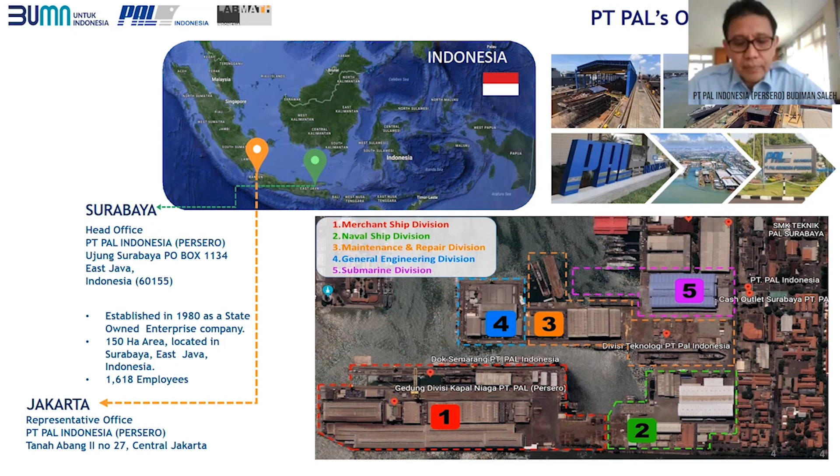We employ around 1,618 employees. We also have a rep office in Jakarta, basically for commercial activities. From these pictures, you can see the layout of the facilities, including the merchant and naval vessel maintenance, repair, overhaul, general engineering, and submarine facilities.

Our product portfolio generally consists of new shipbuilding for both merchant and naval vessels, submarines for new building and maintenance, repair and overhaul, general engineering for electrification and oil and gas activities, and technology development, just like any engineering company should have.

This slide basically depicts all the products that we are proud of. This is not an overnight achievement, but rather requires focus and the ability to adapt to changes.

Being a company from a developing country, we are proud that we have delivered 282 units of general engineering products, as well as 232 units of vessels or ships for various applications.

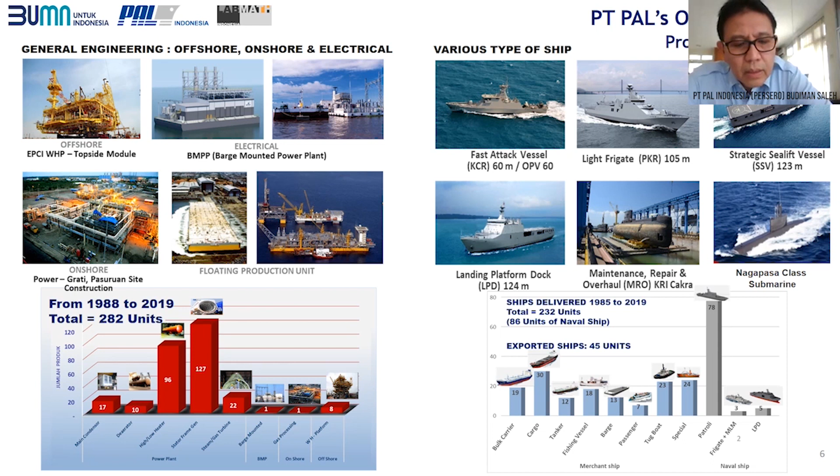These are our customers around the world. Quality, cost, and delivery time play an important role.

Like any big and modern shipyard, we made lots of investment in facilities for manufacturing the blocks, integrating the blocks, loading and unloading, floating, secure, environmentally controlled warehouse, laser tracker, and other test benches for all navigation, communication, sensors, and weapons.

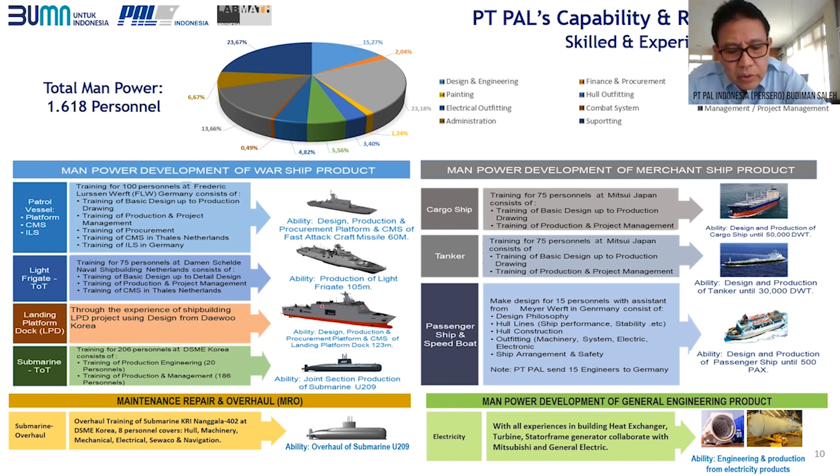We send our employees to various partners around the world for its uniqueness, for defense and non-defense purposes. The names might be familiar for all the audience, such as Lurssen, Damen, Daewoo, Mitsui, Meyer, Mitsubishi, and many others.

We are an integrated IT company for every process or activity. We use all the best engineering softwares available in the market and make them integrated through our IT systems.

In order to cut down the production time, increase the quality, reduce the cost, we utilize the modular construction concept, such that all the big blocks are manufactured and equipped with the components, piping, hosing, electronics, and many others. Every function test is carried out for every module. Once all the modules are finished, the integration is made much easier, just like playing or building Lego blocks.

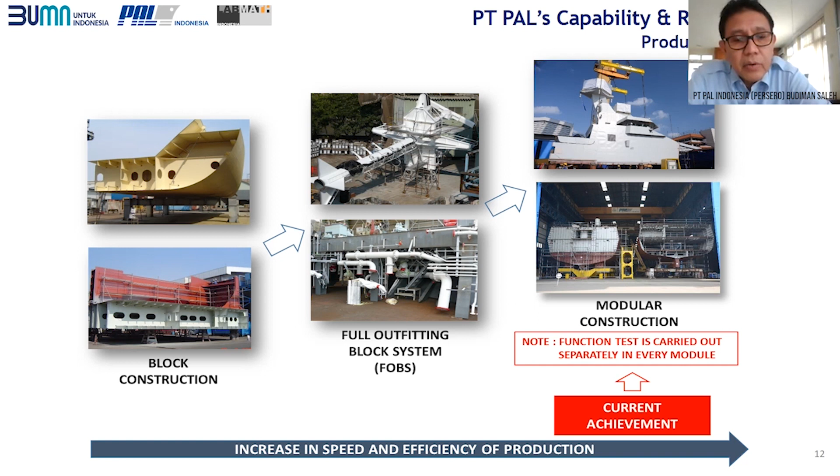As a wrap-up to all the requirements and achievements, this slide shows all the mandatory certificates that we have, including the awards and intellectual property rights for our products.

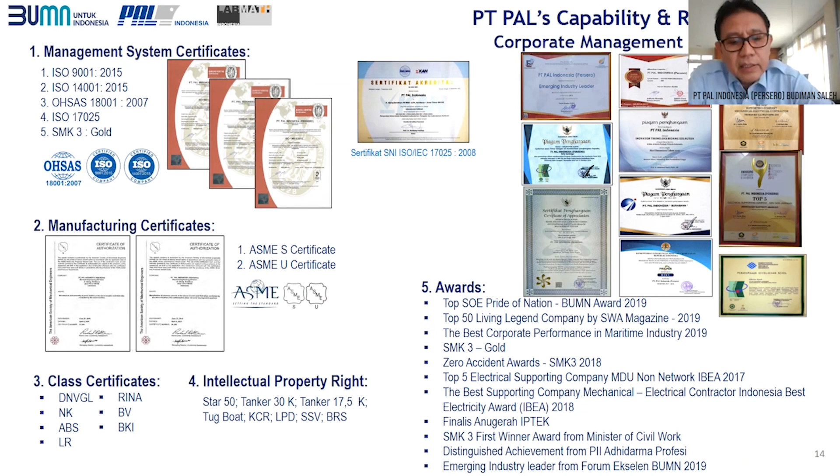Using local resources as well as foreign partners, we developed our famous 57-meter fast patrol boat. Soon it was followed by our indigenous design 60-meter kapal cepat rudal offshore patrol vessel, which is equipped with top-of-the-line missiles and sensors.

We work together with hydrodynamic labs from Indonesia as well as from abroad in order to improve the design and performance of the vessels. For the support ship, we are proud in producing various types of landing platform docks for expeditionary operations, catastrophic evacuation, hospital ship, submarine tender for charging the battery, supplying water, distilled water fuel, loading and unloading the torpedo and missile, and many other purposes.

Since I took the office, we were pretty much focusing on defense and energy sectors. For energy, electrification is the most important target all over Indonesia. We are an archipelagic country. Electricity is still scarce in some remote islands. Barge-mounted power plant, hopefully, is our solution for Indonesia Power and PLN, the State Electricity Company.

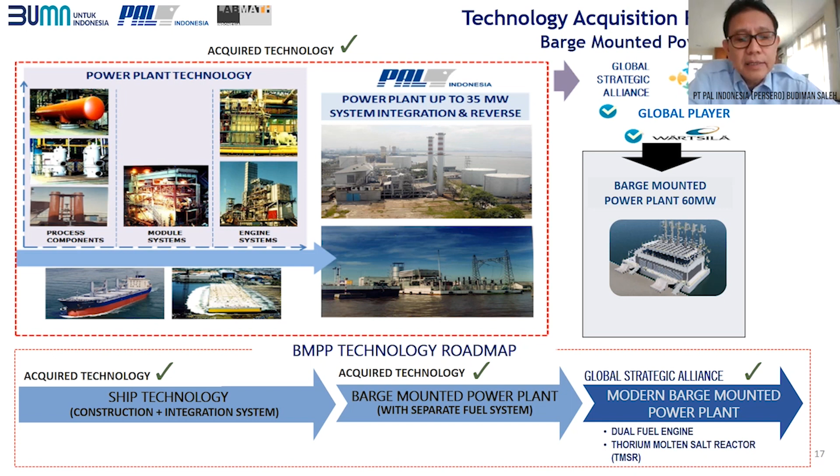Again, being an archipelagic country, distribution of LNG for remote islands, tourist destinations, and many others has to be planned carefully. We propose relatively small LNG carriers, up to 20,000 metric ton carriers. We master shipbuilding technology, but we need to establish a solid collaboration with companies who own LNG tank technology. With this collaboration, we can capture the Indonesian captive market.

Thorium is abundant in Indonesia, even more than uranium deposits, and safer than uranium. Together with Thorcon International, PTPAL performed the feasibility study for design construction, reliability study, and site study.

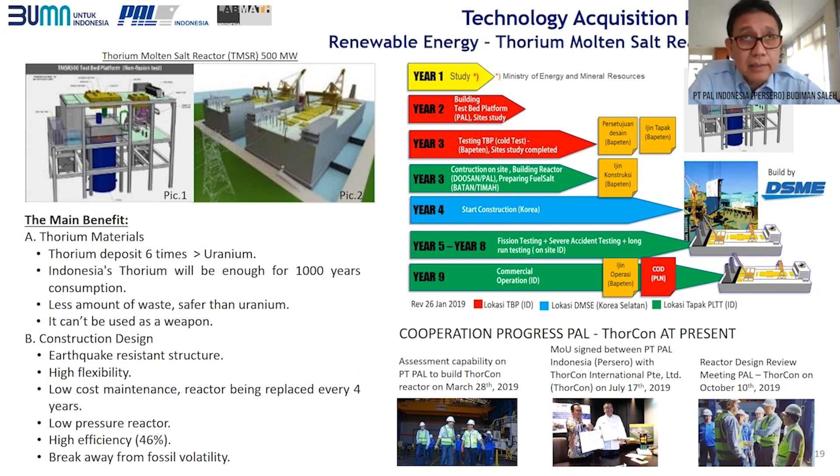Sea wave and tidal as renewable energy are the new topic in PTPAL right now. The basic idea is that we should cultivate what we have in abundance in Indonesia and the technology PTPAL is mastering, in producing a reliable source of sea wave power plant and tidal energy. Of course, collaboration with partners who own the technology is a must.

I selected a few feature products that we are focusing on as our own businesses at this moment. First, barge-mounted power plant can be propelled or non-propelled, can be deployed to any remote area with no electricity, can be deployed to any catastrophic damage area, and many others.

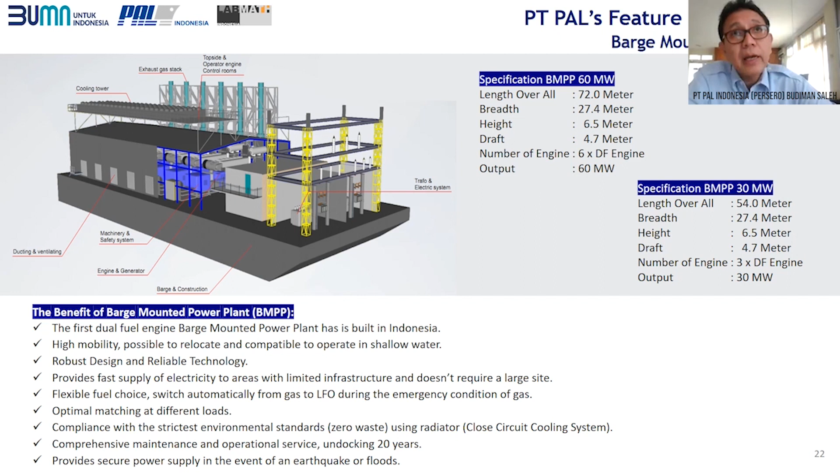Being an archipelagic country and in the Ring of Fire, we are proud of our hospital ship. Yesterday, in fact, we did the first steel cutting of the second hospital ship. The hospital ship can perform all activities, including nuclear, biological, and chemical threats. The hospital ship can also serve as a mini airport where helicopters can land and take off.

For expeditionary force or operation, mass rapid evacuation, and catastrophic evacuation, we produce our famous landing platform docks. Indonesian Navy and Philippine Navy were using this LPD during the RIMPAC exercise with at least 60 other countries around the world.

To safeguard and patrol our borders, we are proud to produce our Kapal Cepat Rudal, or KCR, Offshore Patrol Vessel, equipped with top-of-the-line sensors and weaponry.

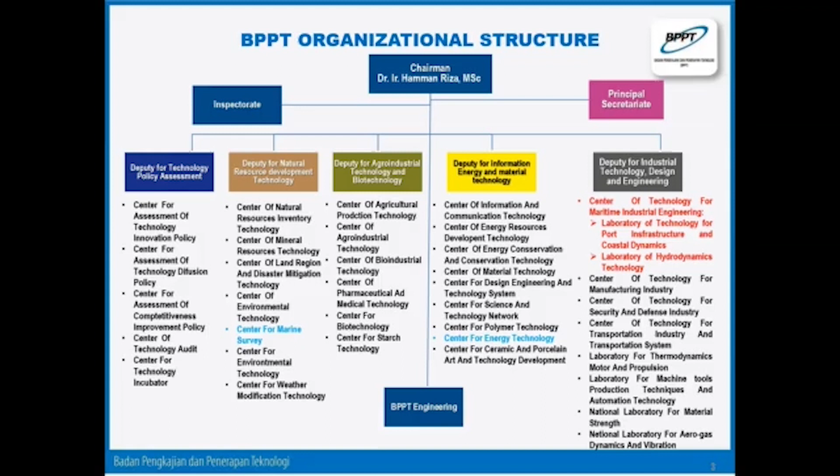This is our Center of Technology for Maritime Industrial Engineering. The Center of Technology for Maritime Industrial Engineering is located at the head office in Jakarta.

However, the laboratories are outside Jakarta. That is the Laboratory of Technology, Port Infrastructure, and Coastal Dynamics, which we call BTIP-DP, in Yogyakarta, and my laboratory, the Laboratory for Hydrodynamic Technology, well known as the Indonesian Hydrodynamic Laboratory, in Surabaya.

This is the Coastal Dynamic Laboratory in Yogyakarta. Their activities are port design, physical hydrodynamics, and tests about coastal dynamics like wave breakers, sedimentation, tsunamis, breakwaters, and so on.

In the laboratory, they have a tank or basin for 3-dimensional testing, especially for tsunami physical model waves, and a wave flume for 2-dimensional tests. They also perform many numerical analyses for coastal dynamic problems.

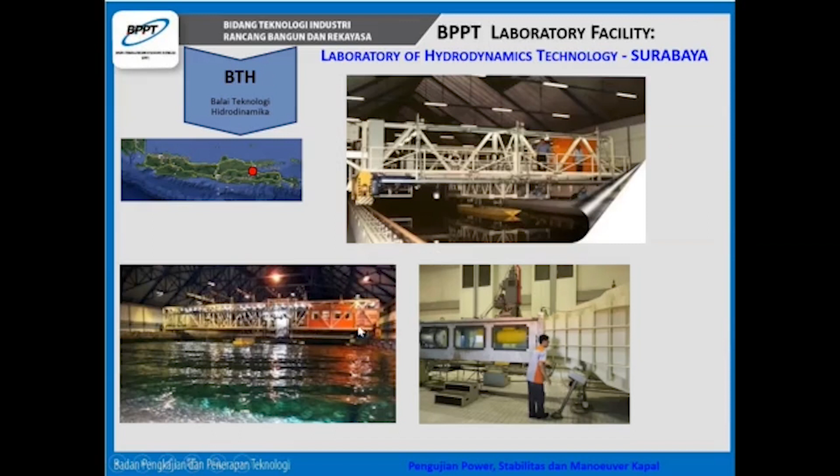I would like to explain the main activities in Indonesian Hydrodynamic Laboratory. This is the aerial view of our Indonesian Hydrodynamic Laboratory by Google Maps. The laboratory area is about 7 hectares.

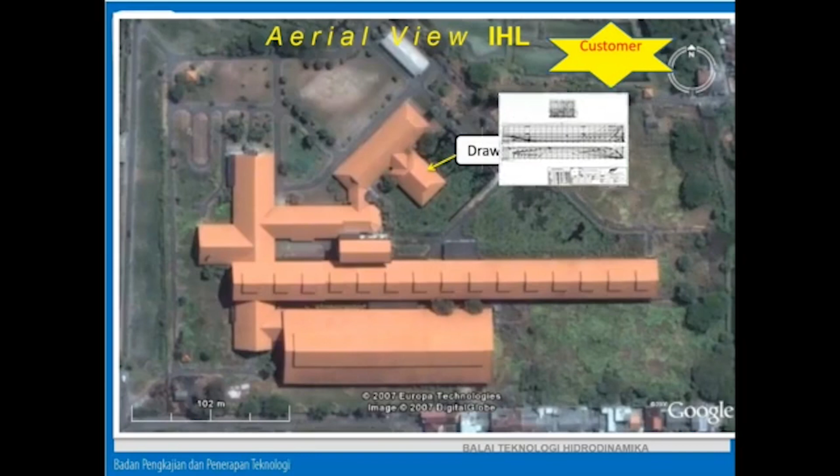We give many services for the customer, especially from shipyard industries and oil and gas companies. When the customer comes to us, usually they provide drawings, like lines plan, kind of hydraulic testing, and so on. We make a new scale drawing, and send this to the ship model workshop and the mechanical workshop.

There a physical model is made, ship model and mechanical model like propeller, stern tube, and so on. When the model is ready, it will be checked by quality control, because we already use ITTC standard and ISO 17025 standard for hydrodynamic testing.

After that, the ship model will be sent to the hydrodynamic facility like towing tank, maneuvering, and ocean basin, or cavitation tunnel.

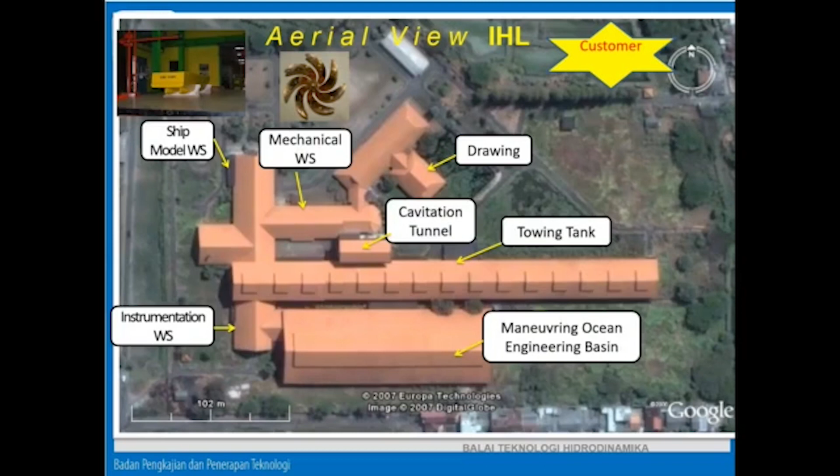This is our towing tank. The dimension of the towing tank: the length is 235 meters, the width is 11 meters, and the water depth is 5.5 meters. It is equipped with carriage and wave generator. The maximum speed of the carriage is 9 meters per second, and the maximum wave height is 70 centimeters.

The service of this facility is for ship power prediction, wave pattern analysis and flow visualization test, propeller open water test, engine matching solution, unconventional propulsion system model test, and numerical computation. We also use statistical power prediction.

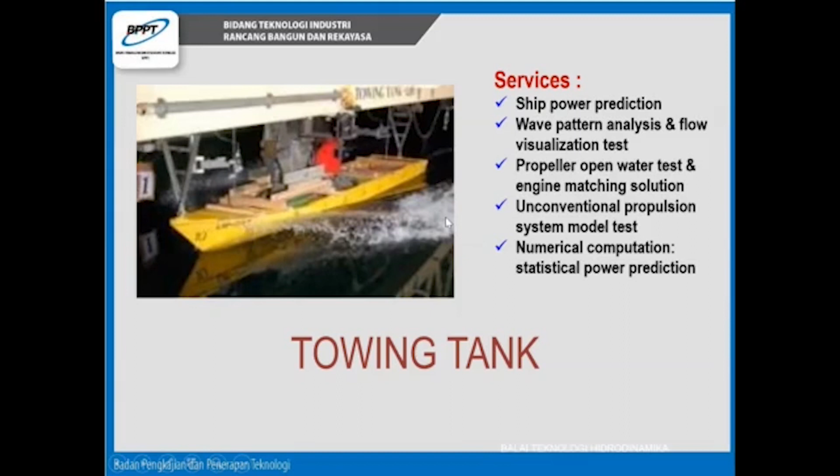This is our maneuvering and ocean engineering basin called the MOB. The basin dimension consists of two basins. It has a deep water basin: the length is 60 meters, the width is 35 meters, and the water depth is 2.5 meters. But in the middle of the deep water basin, there is a pit with size 5 times 5 meters for horizontal and 9.5 meters for water depth.

Another basin is shallow water. The length is 45 meters, the width is 35 meters, and the water depth is 1.25 meters. It is equipped with wave generator, with a longitudinal side of wave generator and transverse side of wave generator. It can generate regular wave, irregular wave, oblique wave, and also we have a carriage with speed 2 meters per second that can move in longitudinal and lateral direction.

The service for the maneuvering and ocean engineering basin is offshore design appraisal, offshore hydrodynamic experiment, mooring design and analysis, sea-keeping quality investigation and model test, maneuvering quality assessment and simulation, numerical computation, ship motion analysis, time domain mooring analysis, and ship maneuverability prediction. We also were involved with the development of floating LNG of the Abadi Masela project and also the Chevron project for floating production unit.

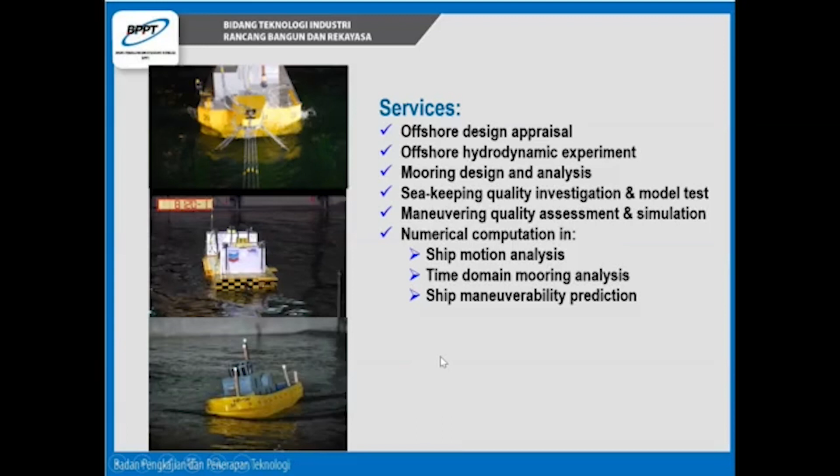This is our cavitation tunnel. The services include cavitation phenomena prediction, measurement of propeller excited hull vibration, numerical computation, and prediction for unsteady propeller cavitation. The testing size is 0.85 times 0.85, and the length is 4 meters. The maximum speed of the water is 9 meters per second, and maximum pressure is 2 bar.

Besides giving service, we have our own research. I would like to share our present research agenda. The first research concerns designing a harbor tugboat that has dual fuel for the engine, using conventional fuel and LNG. This research is a national research priority.

We collaborate with several institutions like ITS, Surabaya 10 November Institute of Technology, Classification Bureau, and the biggest shipyard in Indonesia, PT PAL, and also PT Pelindo Marine. Next year, together with ITS, we have to finish the design of LNG storage, regasification unit, and also the converter kit. The target for 2024 is design approval by Classification Bureau for the harbor tug, prototype of the regasification unit certified by the regulator, and the converter kit system optimized for harbor tug engine.

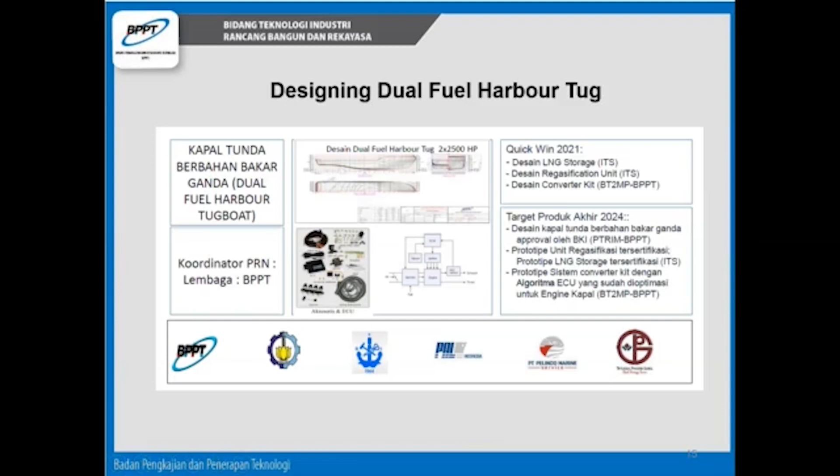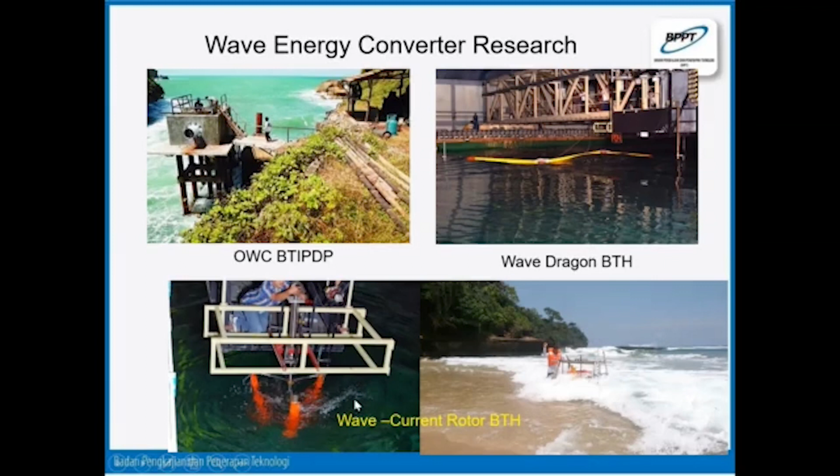We also researched a combination of wave and marine energy converter called the wave current rotor turbine, which was already tested in South Malang Beach.

The famous one of our research is the marine current turbine installed in Larantuka Strait, which is situated between Flores Island and Adonara Island.

Because of this research, Larantuka Strait is now famous worldwide. Many ocean renewable energy technology providers and investors want to install their marine current turbines there. The investor that received permission to install a marine current turbine is a consortium of Tidal Bridge from the Netherlands.

You can see the video of the test of our marine current turbine on YouTube, on my YouTube channel.

So this is my last slide, on possible collaboration research.

Starting this year, BPPT got an assignment from the Indonesian government to install 32 tsunami early warning systems. These will be installed in the Indian Ocean and Pacific Ocean.

We already designed the conventional tsunami early warning system, which is buoy type. There are two components of the buoy tsunami early warning system: the buoy that floats on the surface, and the ocean bottom unit integrated with the sinker. The two components are connected with a mooring system.

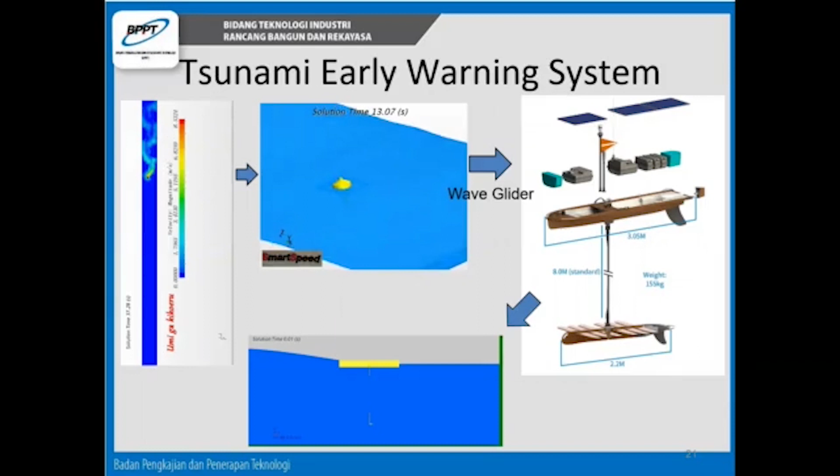The conventional buoy system is quite expensive, so we have an idea to change the buoy system with a wave glider. Through the wave glider, we don't need an ocean bottom unit and mooring system.

The wave glider will move freely in a certain limited area and collect the motion of the water column, which is affected by earthquakes, and send the signal to the satellite directly.

There are two components of the wave glider: the floater and the glider itself. The movement of the wave glider comes merely from the response and relative motion of the floater in the wavy water.

The pitch and heave motion of the floater will generate motion in the several foils of the wave glider. The flapping motion of the foil will produce surge motion and tow the floater in the forward direction.

This is the simulation of the response of the floater due to the wave, and how it affects the motion of a single foil.

The research is still in an early stage. We need collaboration with other institutions, especially for designing the flapping foil system of the wave glider.

For example, determining the pivot position of the flapping foil. The pivot, where the foil rotates, has a great impact on the force produced by the foil.

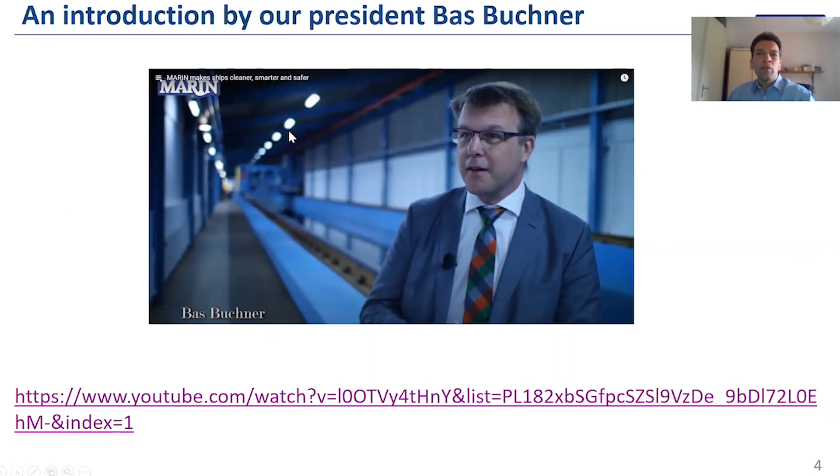First, I will show a video with an introduction of MARIN given by our president, Bas Buchner.

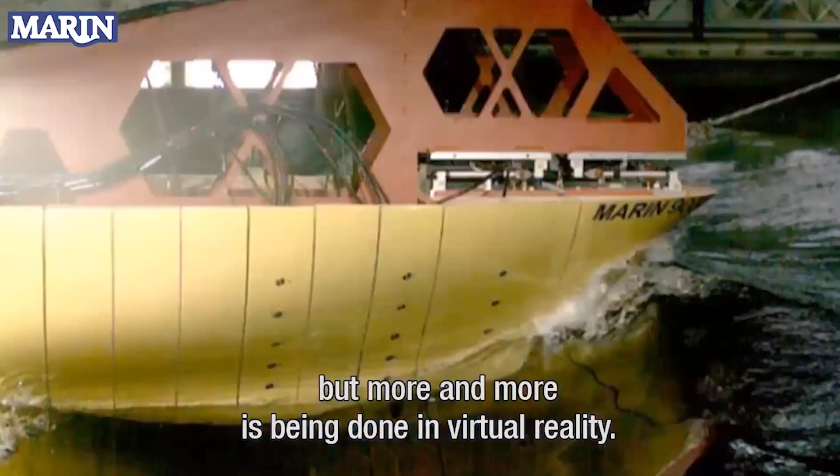After this introduction by our president, I would like to show you MARIN's view on the future of ocean energy and shipping.

The future of ocean energy and shipping. At any given moment, tens of thousands of ships are sailing the world's oceans and rivers, carrying about 90% of total world trade. Transport and energy production rely mainly on fossil fuels. Oil, gas, and coal account for more than 80% of our entire energy supply. Although fossil fuels have been an incredible driver for development, they also represent a major threat to the climate.

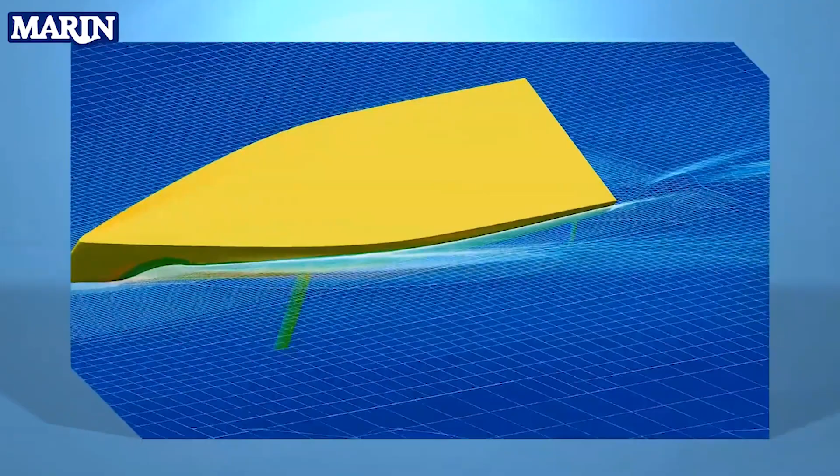We have to develop renewable energy supplies if we want the planet to remain habitable. We believe that the oceans, which cover more than two-thirds of our planet's surface, will be the key to a sustainable future. Zero-emission shipping is the only way forward. This can be achieved by more efficient vessel design, as well as by the use of wind and other renewable energy sources. While hydrodynamic techniques in ship design have led to optimum performance, the integration of energy supply and propulsion systems will bring us even further towards zero emissions.

Zero emission will only be achieved by developing renewable fuels as an alternative to fossil fuels. Shipping could be energy neutral by 2050 if we power ships with wind and solar-generated electricity. The wind and the sun represent a massive source of renewable energy, which is more abundant at sea than on land.

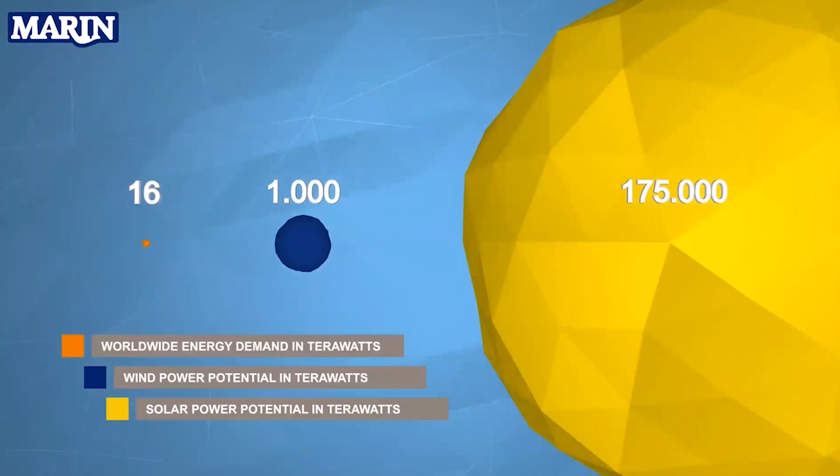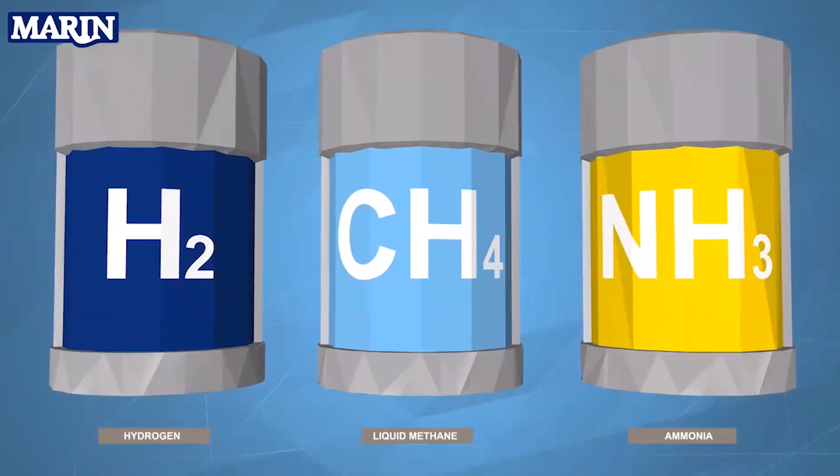Harvesting this energy will require offshore wind parks and floating solar panels, as well as wave energy converters, tidal turbines, and ocean thermal energy conversion. Processes are being developed to store the vast amount of renewable energy efficiently, in the form of hydrogen, liquid methane, or ammonia, for example. The availability of this technology offshore will be a game changer for shipping and harbors, creating entirely new maritime infrastructures.

Large-scale wind and solar-powered energy and transshipment hubs will be located along major shipping routes. These energy islands could be used for renewable energy conversion and storage, but also as logistics islands, where cargo could be transferred from larger to smaller ships. The shift to ocean energy hubs will not only support next-generation shipping, but will also open up the possibility of floating settlements.

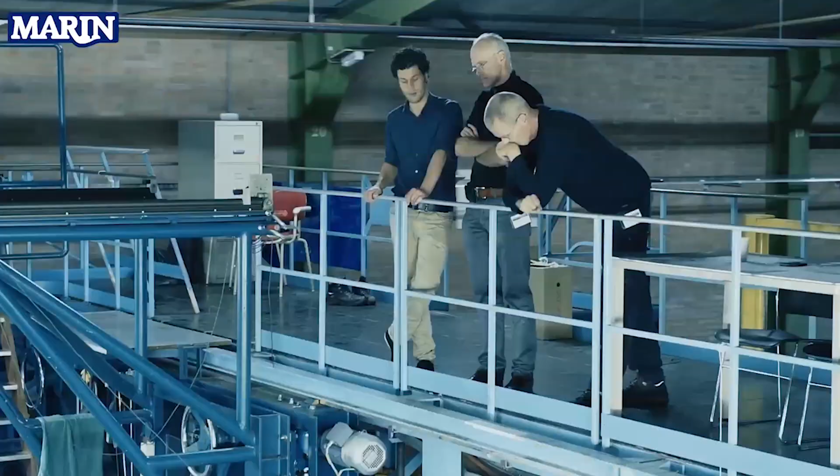This imminent revolution demands that we rethink the way we engage with our blue planet. We must redesign ocean transport as well as tomorrow's energy. MARIN: better ships, blue oceans.

So now I would like to talk a little bit more about MARIN's activities related to blue growth. Blue growth is the long-term strategy to support sustainable growth in the marine and maritime sectors as a whole. This is a topic that is strongly supported both by the European Union and the Dutch government, and MARIN's activities related to blue growth over the last 5 years have increased considerably.

Therefore, I would like to show a few examples of our blue growth activities. One of them is the concept development to show the potential of floating islands. In the movie on the future of ocean energy and shipping, you have already seen a few examples, and I would like to show a few more details. So these floating islands can be used for multiple purposes. One example is to use them as energy islands, where they can be used for maintenance, for example, maintenance of offshore wind turbines, but also for the transport and storage, for example, of hydrogen in the future.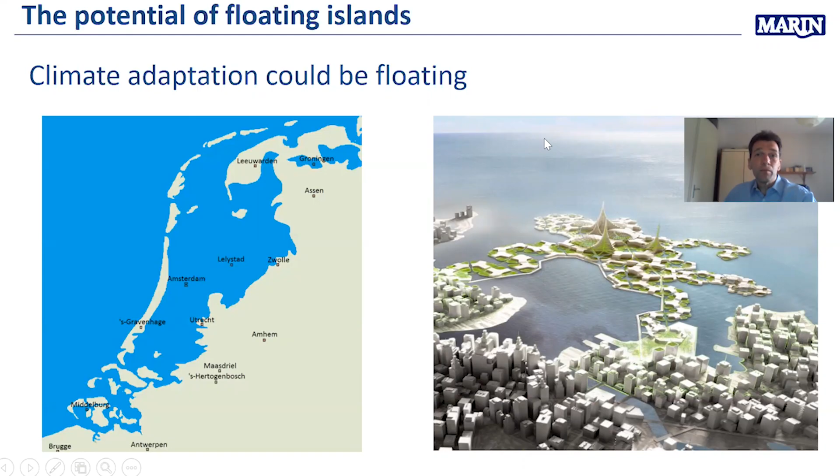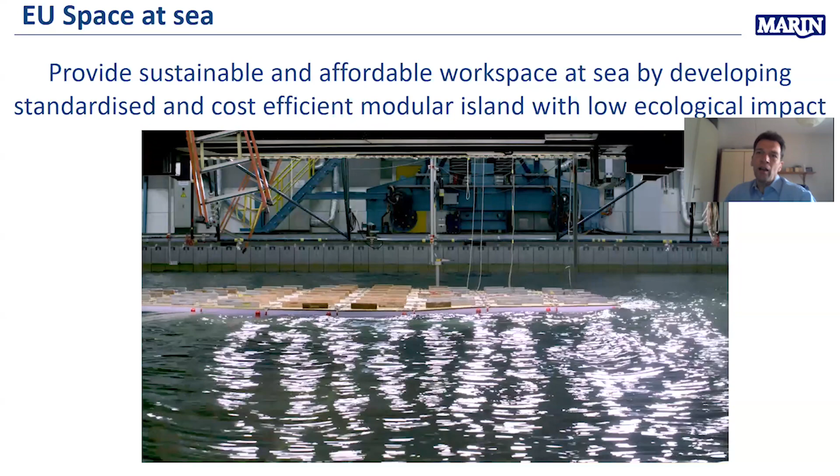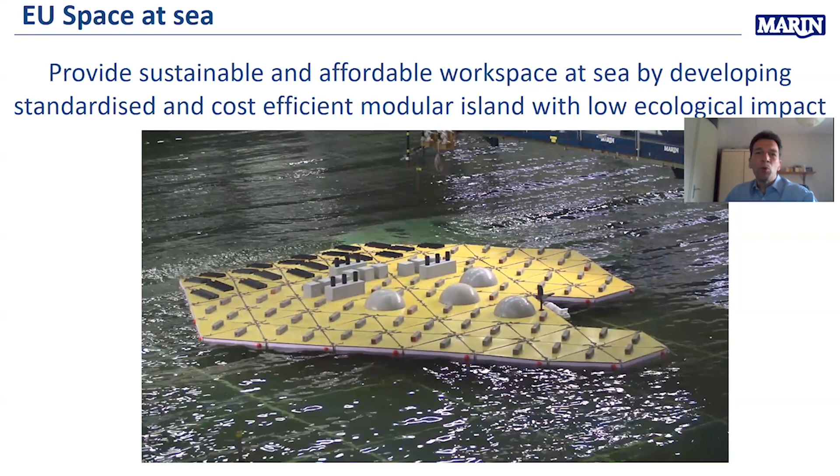A few years ago, we started a European project, Space at Sea, with the objective to provide sustainable and affordable workspace at sea by developing standardized and cost-efficient modular islands with low ecological impact. In the video, you see the model tests that we carried out for this modular island in our offshore basin. The concept consists of triangular modules, which can easily be connected and disconnected and used for multiple purposes, like energy storage or even living at sea.

At the moment, this European project is being finalized.

For these modular islands, it's quite challenging to perform numerical simulations, just because of the sheer size of these islands, which can be several square kilometers. Even our most simple numerical models, based on linear theory, have quite a lot of difficulties doing computations for these concepts, just due to the sheer size.

But here you see an example where we modeled the island. It's sort of a diamond shape in our linear diffraction tools, and you can compute along the length of the island what the pressure is due to the waves.

You see the pressure on the left due to the undisturbed wave system, then the pressure distribution that occurs due to wave diffraction, which is basically the reflection of the waves on the island. The sum of the two is the total excitation pressure on the island - really the forcing, the loading that the island feels.

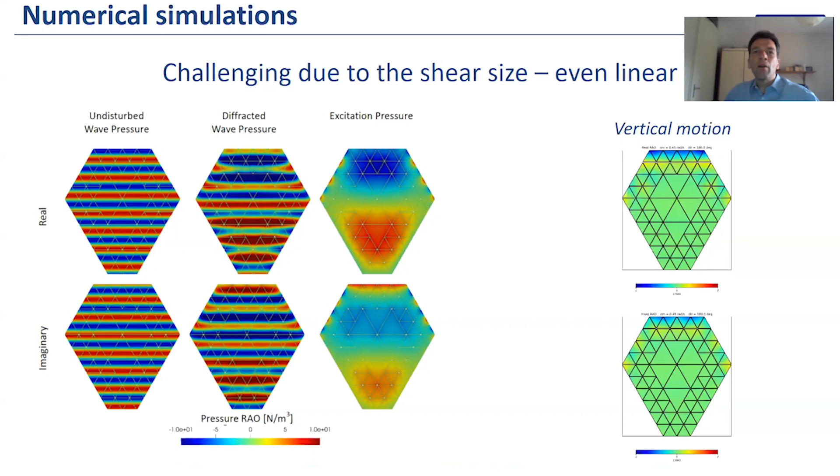Because of this loading, the island starts to move. On the right, you see the vertical motion of the island at one specific wave period. These computations can be done, but you really need a computer cluster like we have available at MARIN to perform these kinds of simulations, even with a linear tool.

Another example that I want to show is the work that we did on submerged tunnels. I will show a video on this topic.

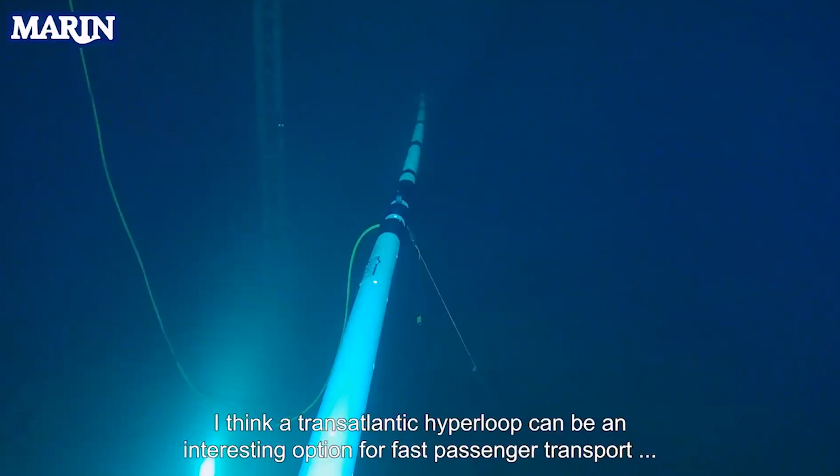I think a transatlantic hyperloop can be an interesting option for fast passenger transport across the Atlantic in a sustainable way, as an alternative to polluting airplanes.

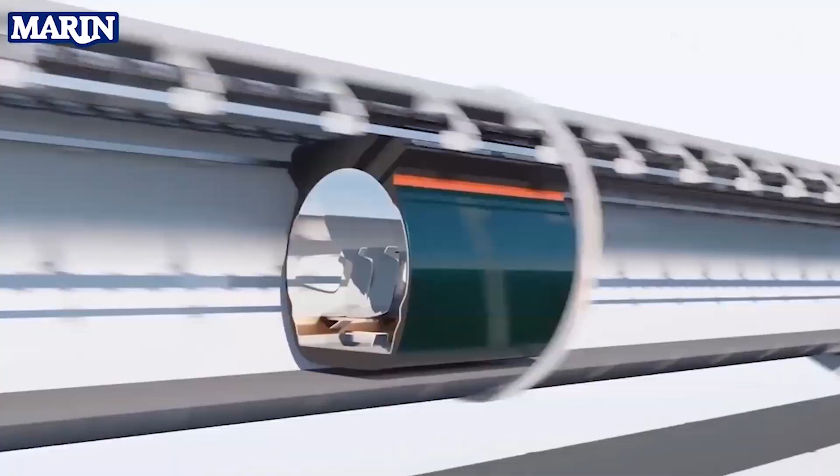In the Hyperloop, we transport pods that are around 30 meters in length and house about 60 people. Compared to a high-speed rail, that would be very small, but we do that to increase our frequency.

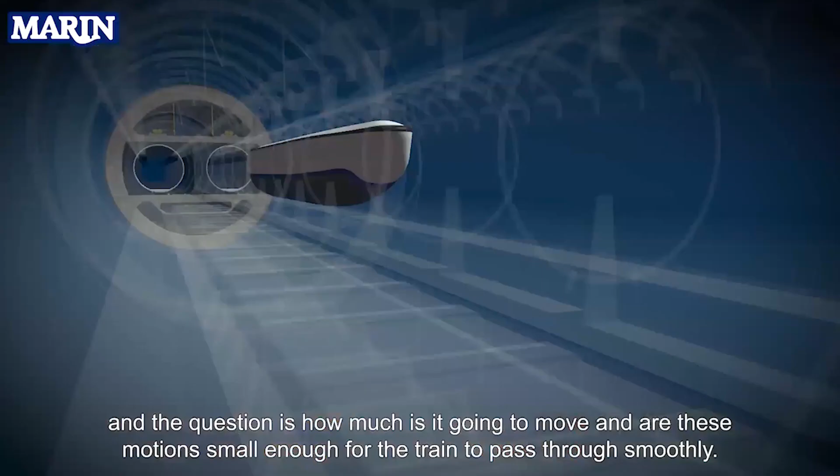This test is to identify the motions of the tunnel due to waves. Waves run on top of the ocean and the tunnel is going to move a bit. The question is, how much is it going to move, and are these motions small enough for the train to pass through smoothly?

The model is 140 meters long, which is equivalent to a tunnel of 15 kilometers. The middle of this part responds the same as the long tube, which is over 5,000 kilometers.

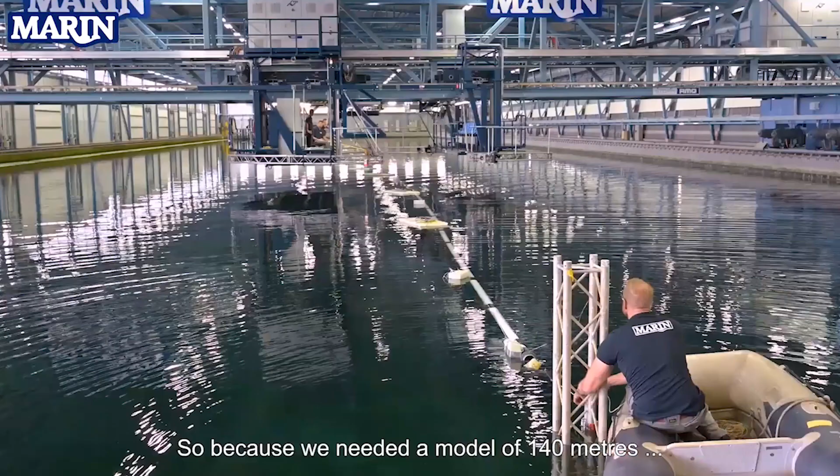MARIN is a unique place. We have unique facilities - this basin you see behind me here is 170 meters long. Because we needed a model of 140 meters, this is one of the few places in the world where you can do this, especially because we also want to make waves and see how the tunnel responds in waves.

The first step, once the model comes out of the basin, is to fully understand what happened. So we're going to analyze all the results and hopefully build a consortium to further develop the concept of mid-water floating tunnels.

The last example I would like to show is related to floating solar systems. These are already developed for sheltered areas, lakes, like the one shown here in the Zwolle area in the Netherlands. I think it's one of the biggest floating solar systems that exist at the moment, but of course there's only limited space for that.

Therefore, we are also involved in developing concepts for harsh ocean environments, because there the space is almost unlimited.

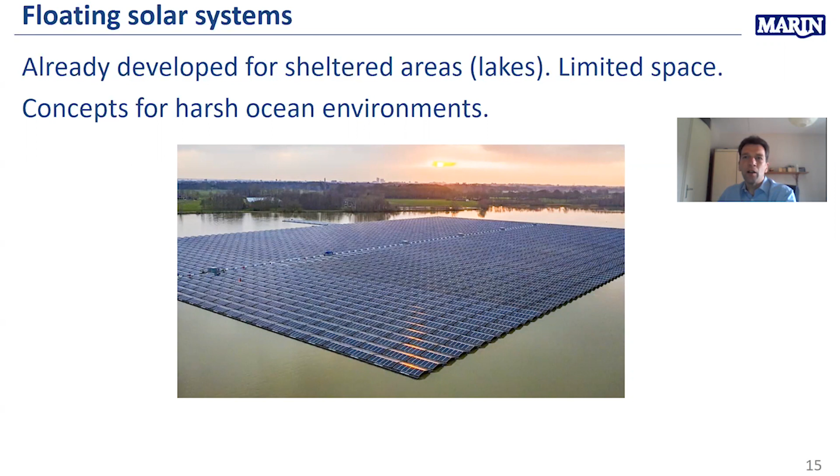This is a video of a project that we did together with an innovative company, Sunfloat, that has developed a prototype for such a system.

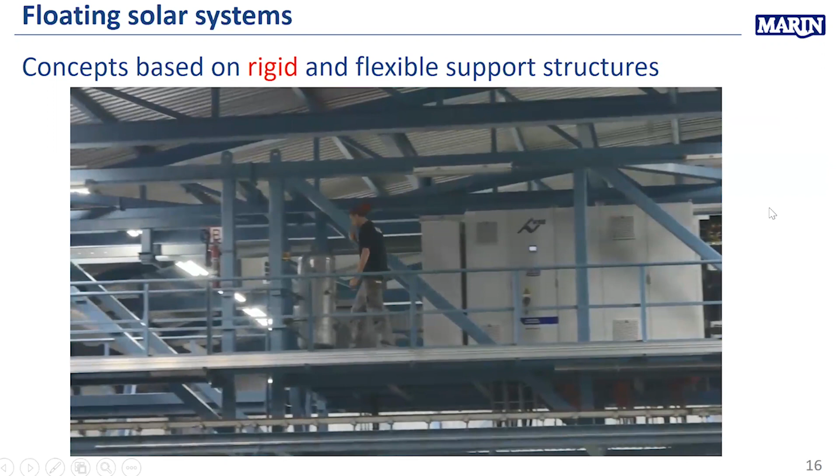Every development which we can do in the combination between energy and water, for me, it's the right option.

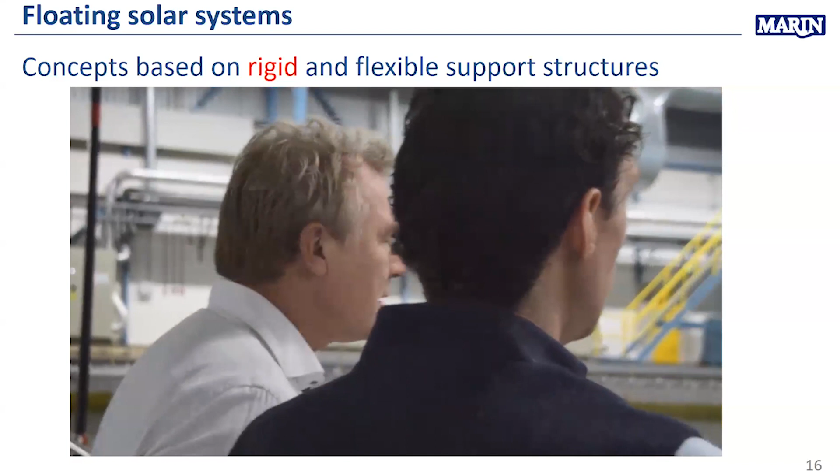MARIN tries to make ships cleaner, safer and smarter, and to contribute to a sustainable use of the seas. We also want to work with small, innovative companies like Sunfloat. The idea is that they bring the concept, and we show them how it works in reality at sea, and how we can improve it. Our project managers think with the client to improve the concept based on our knowledge.

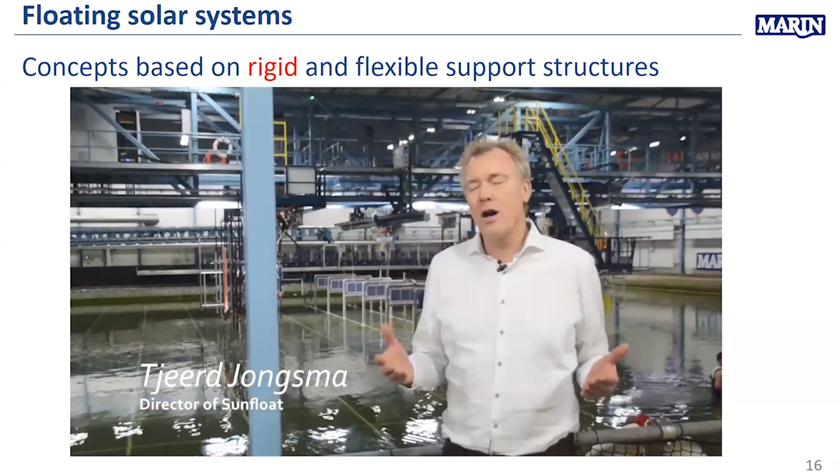I really believe in floating solar. There is so much space we can use, and two-thirds of the earth is water, so when we harvest energy, we should harvest it on the water. We already have a product, and from that product we can reason backwards to find the better, or best, product. For that we need the expertise of MARIN, because they really understand the physics behind these products, and from that we can develop the new version.

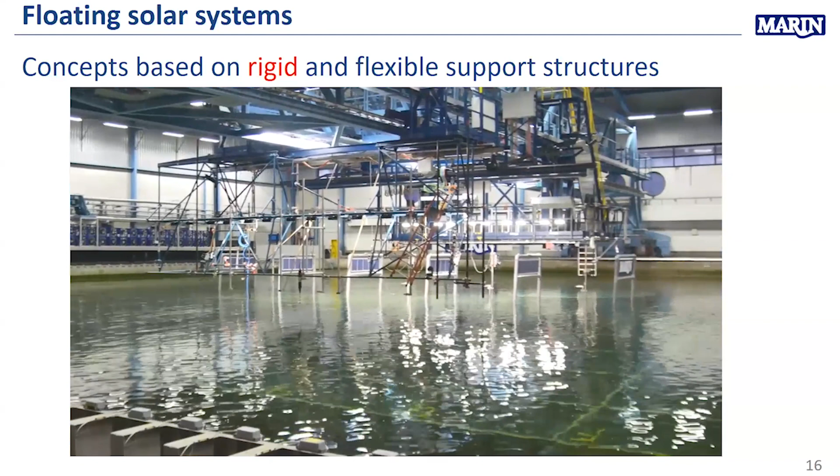We have been working in floating oil and gas for many decades. We have been working on floating wind for the last decade, and we are really starting with floating solar now. So for us, it is very interesting to be involved.

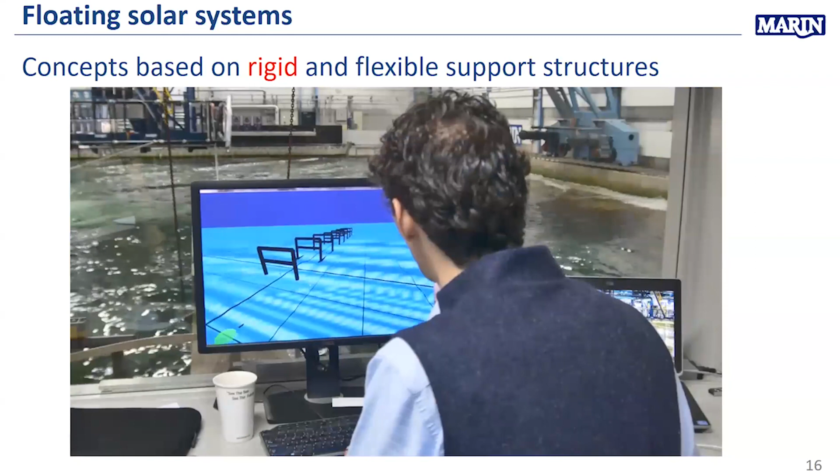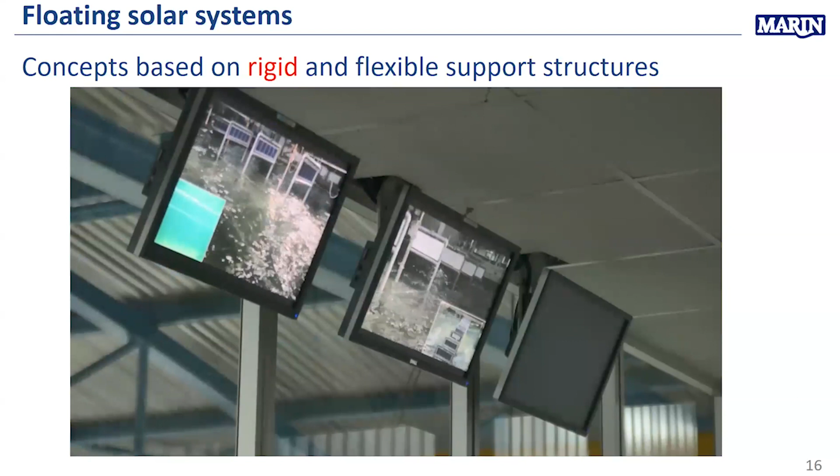Beforehand, we made numerical predictions of the motion behavior, and we are very curious to learn from this model test how valid it is. We measure the produced waves at the location of the model, we measure the motion response of the model to the incoming wave, and then impose that same wave in the numerical simulation. If we get the same motion response of the platform in the basin as in the simulation, then the numerical model is validated.

In a numerical model, you can vary all kinds of parameters, and that gives you the ability to use it as a design tool. So if you want to design for specific conditions, it's quite easy to vary those parameters and come to an optimal design.

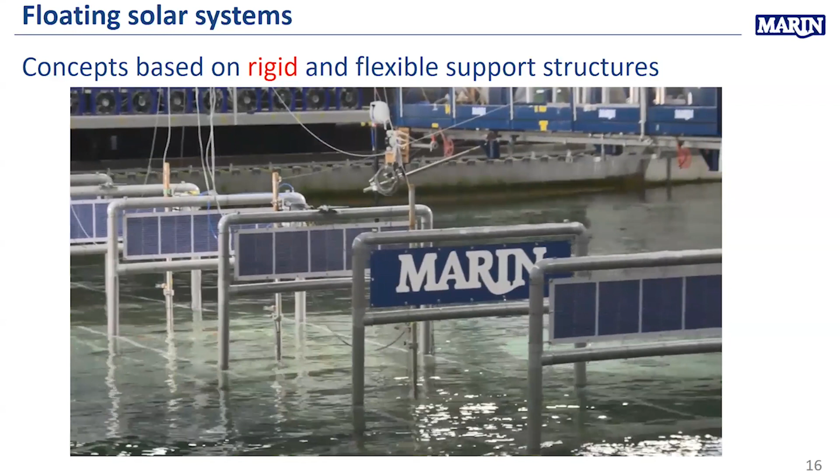Working with MARIN is great fun, because you meet a lot of very passionate, experienced people with great knowledge in this area. Combined with working together with ECN, the energy center in the Netherlands, this combination of two pools of people who really know a lot about their own field makes innovation really fun to do.

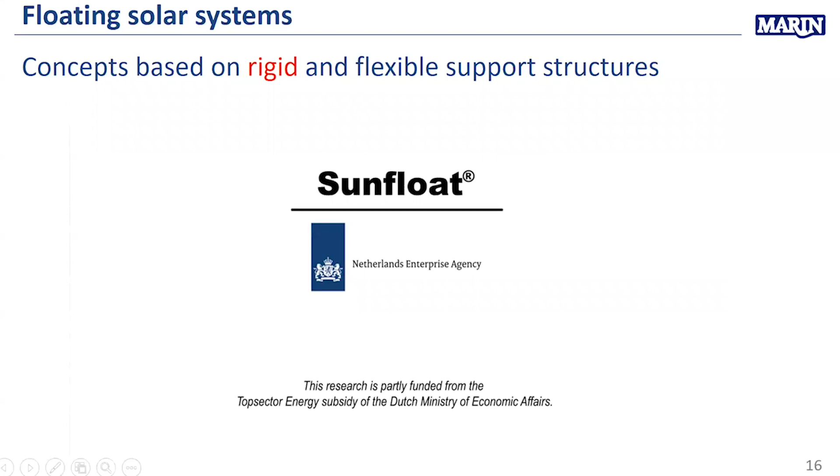This concept is based on a rigid support structure that supports the solar panels. We have also been involved in developing concepts based on a flexible support structure, consisting of an encapsulated PV module together with a carrier foil supported by a floater material, some kind of foam mattress, for example, that prevents the solar panels from sinking. The challenge here is that the material can deform due to wave action, and the deformations should not become too big in order not to damage the solar panels.

We are performing numerical simulations for these modules, model tests, and also full-scale testing to see the behavior in waves, and whether this is really a feasible concept for the harsh environment, such as you can see in the North Sea.

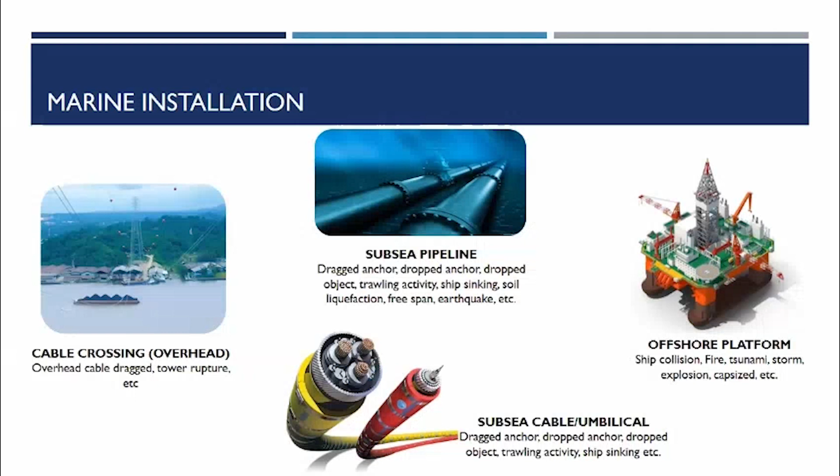Why does the government need to regulate this matter? It is very obvious that the existence of this facility will provide hazard to marine traffic, or vice versa. With these examples of possible hazard, it's clear the government needs to regulate to protect not only the facility, but also the people and the environment.

The next question is how we could ensure the safety of this facility. One well-used method is called risk assessment, in which potential loss is measured by incorporating the frequency of incidents and its consequence.

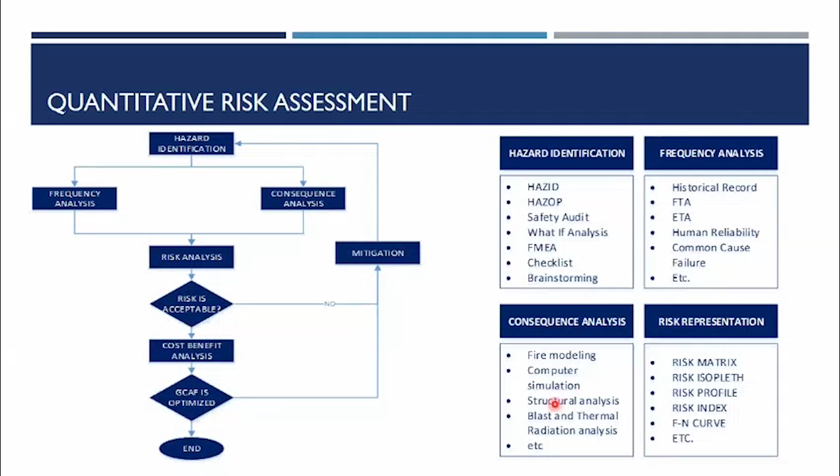Some methods have been well developed and established in every sequence of the risk assessment, as we can see in the right part of this slide.

Ladies and gentlemen, now after understanding the generic process of risk assessment, shall we have a look at how we implement the process of assessing risk in a real situation.

At first, I will introduce a case we had some years ago, in which an offshore platform was going to be installed very close to a shipping channel. The hazard of ship collision with the platform was very obvious, as we can see from this slide.

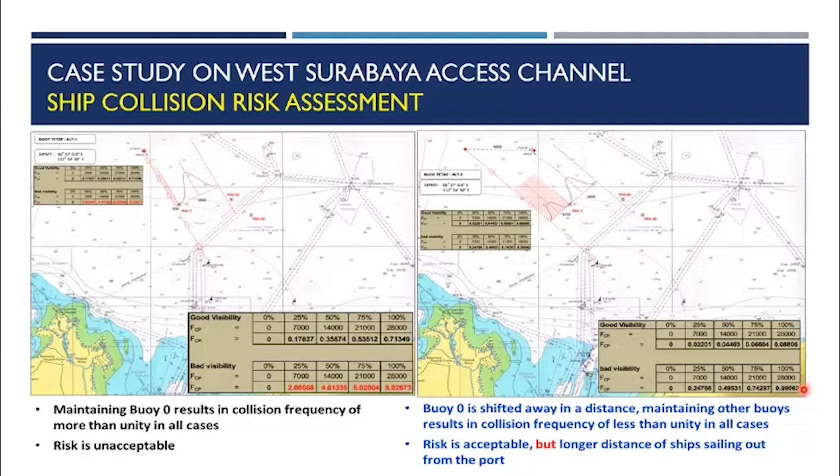By doing so, the distance between the platform and the center of the channel will be wider. As a result, we can reduce the collision frequency from 8 collisions per year to only 0.9 collisions per year, which is almost less than unity.

A further investigation can be performed to find the best design of locating the buoy. At the same time, we need to consider the best way of ship navigation through the channel. After the process is verified, we can decide the coordinate of each buoy that will ensure the collision frequency within a year is less than unity.

Next, I would like to introduce another case study on subsea pipeline risk assessment, which uses a different approach compared to the previous one. This table shows all possible hazards that might happen to a subsea pipeline.

Det Norske Veritas and GL, Germanischer Lloyd, RP F107 has recommended some possible hazards, as we can see in this table. All these possible hazards need to be considered when we measure the risk of a subsea pipeline to be installed under the water.

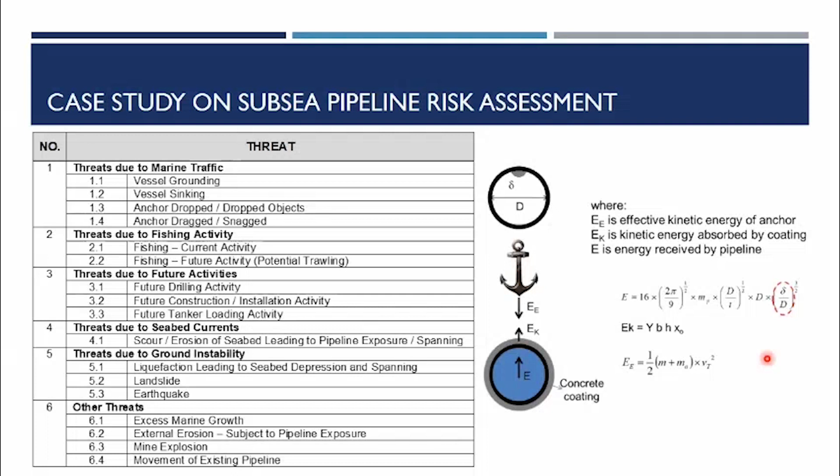We found the denting diameter and the frequency of the drop anchor, drag anchor, and ship sinking onto the pipeline. Then we could find the recapitulation of the frequency level.

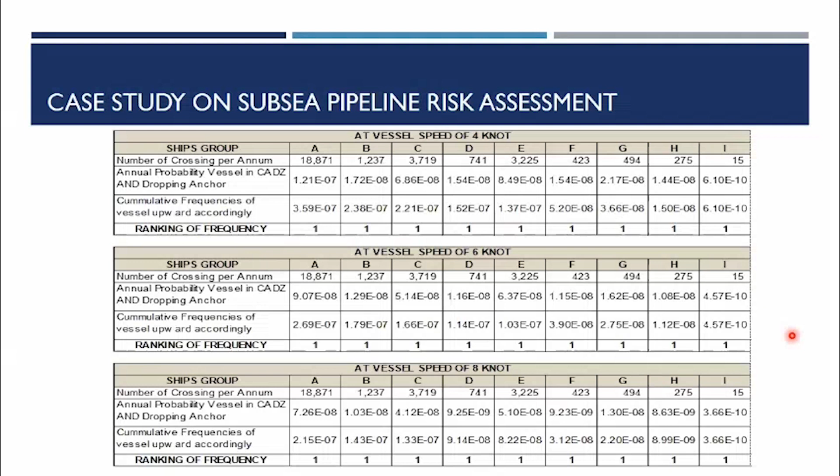As we can see from this slide, all frequency levels lie in number 1, since the collision frequency is less than 10 to the minus 5.

As we can see here, for small vessels, the denting diameter is less than 5%, which lies in consequence number 1. But for big vessels with big anchors, the denting diameter will be more than 20%, which means the pipeline is ruptured.

According to our experience, it just happened last year. We were requested by a port company to assess the safety of a floating LNG terminal located in Surabaya.

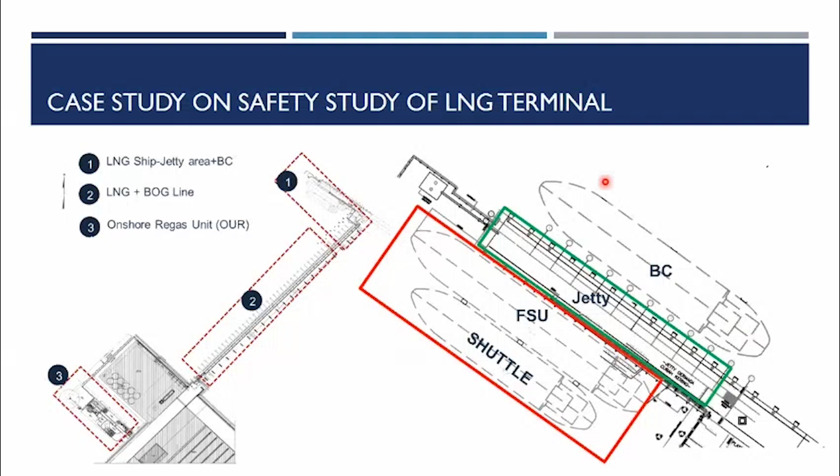Frequency analysis is performed to assess the possibility of LNG leakage, and if it's ignited, we measure the possibility of flash fire, pool fire, jet fire, or even vapor cloud explosion. At the same time, we also perform consequence analysis using fire modeling methods.

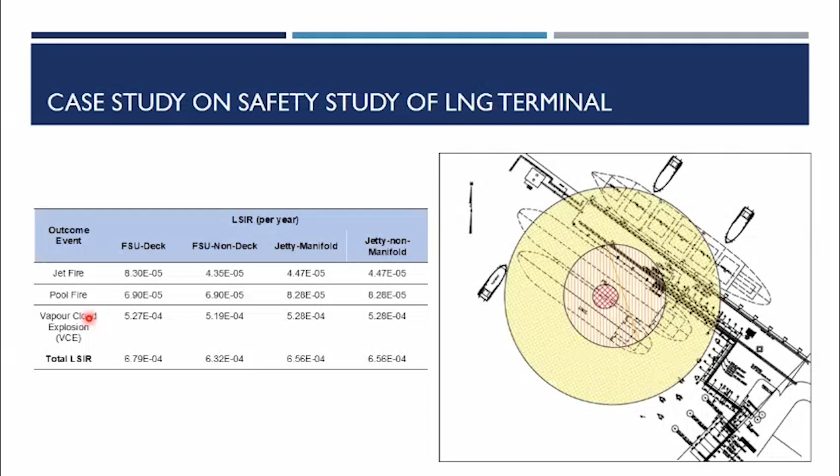For your information, in our center we also conduct many studies on LNG distribution, because our current government has a big plan to distribute clean energy, including LNG and natural gas, to many areas in Indonesia, especially the eastern part.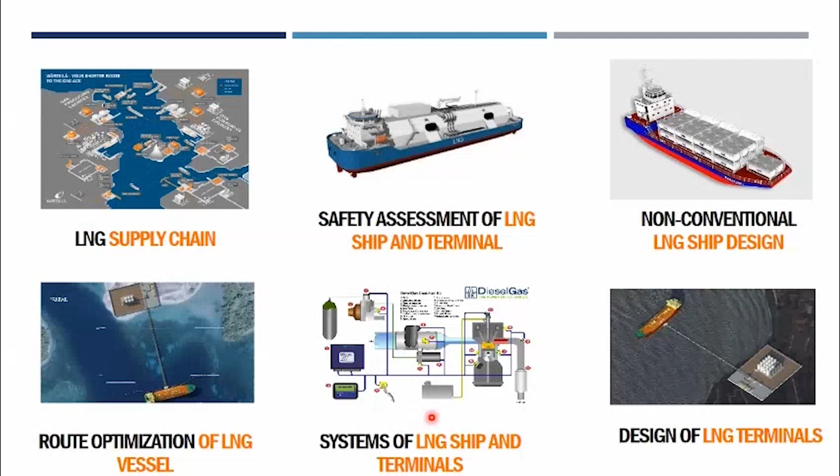Our Center of Excellence has for more than 20 years been doing research on LNG supply chain, safety assessment of LNG ship and terminals, non-conventional LNG ship design, and route optimization of LNG vessels, including the system of LNG vessels, ships, terminals, and terminal design.

We've had the opportunity to design LNG distribution in the eastern part of Indonesia in cooperation with British Petroleum and SKK Migas, and also the opportunity to design LNG distribution in the central part of Indonesia with the National State-owned Enterprise of Gas Distribution, PGN, and an electricity company.

This picture shows our counterparts and partners in performing many studies on LNG distribution.

As mentioned previously, our center also developed an early warning system to maintain the safety operation of offshore facilities. We call it AIS-ITS, the abbreviation of Automatic Identification System of ITS Surabaya. We have a website application as well as mobile applications.

This application can be utilized to ensure the safety of marine installations, covering offshore platforms, underwater pipelines, and underwater cables. We also use it for ship management at port, ship tracking, fuel monitoring, monitoring potential ship exhaust emissions, and ship inspection.

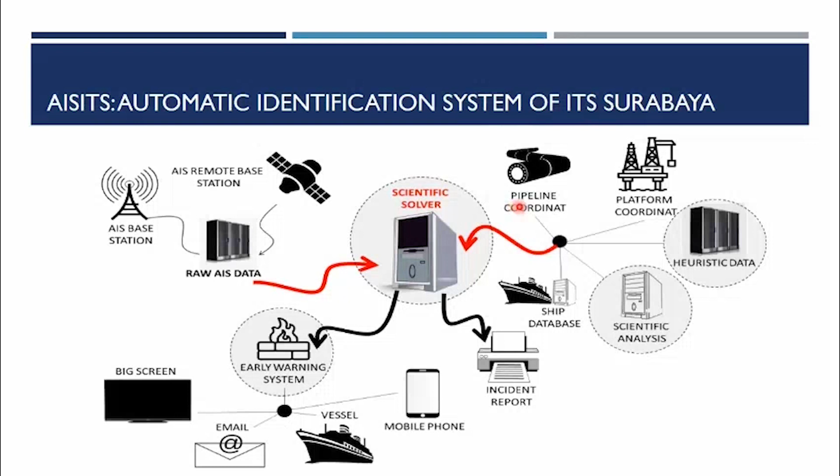We install many Automatic Identification System units developed in our center in many places. We obtain the data, record it into our server, and implement many algorithms. One algorithm we developed is used as the early warning system to maintain the safety of pipelines, platforms, and the ships themselves.

We've installed many devices in the northern part of Java Island. With this facility, we can now cover the Java Sea and track all ships real-time in that area. We've also installed equipment in Kalimantan, and we've received a lot of data on ships operating in that area.

As mentioned, we work with a private company, and through this cooperation we now operate one office in Jakarta with a sophisticated data center and monitoring room. We also still work with our students here at the university to develop many applications based on the data obtained from the devices.

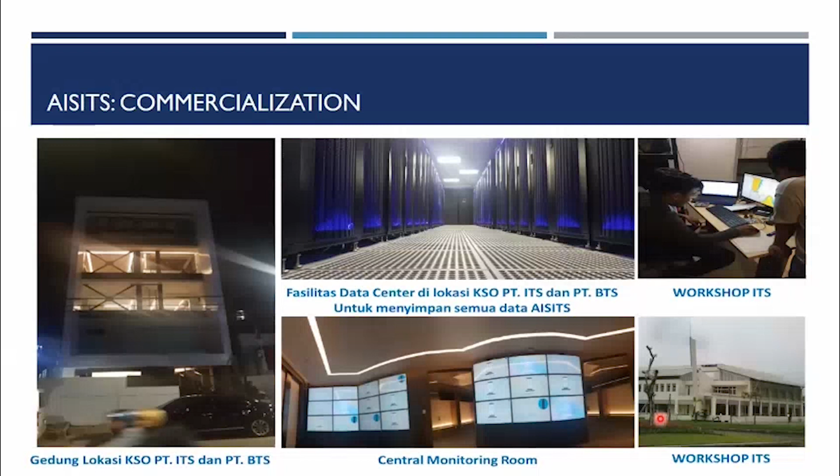This picture shows our student who developed a startup providing an early warning system for major oil and gas industry players in Kalimantan. The devices have also been utilized by the government to design a traffic separation scheme for two main straits in Indonesia: the Sunda Strait and Lombok Strait.

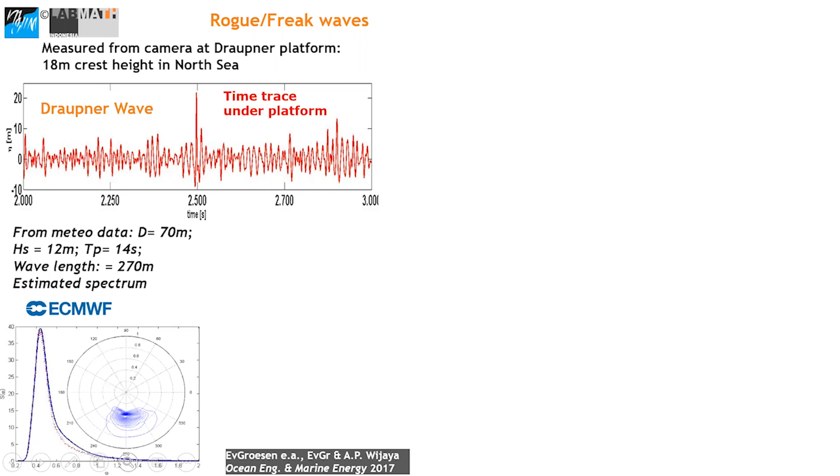To be able to simulate such a high wave, we are using meteo data from the area surrounding the Draupner platform. Here is the meteo data and the spectrum. We add a random phase and reconstruct the sea surrounding the Draupner platform.

As you can see here, you have 3 successive freak waves at different locations from this reconstructed sea, based on the meteo data.

Such high waves are very dangerous for ships. So we also take a look at the statistics and see that waves exceeding 18 meters occur on average every 20 minutes over an area of 1 kilometer square.

So recently we added a module for radar reconstruction, which can see waves far away and predict the wave close to the ship, 2 minutes ahead of real time.

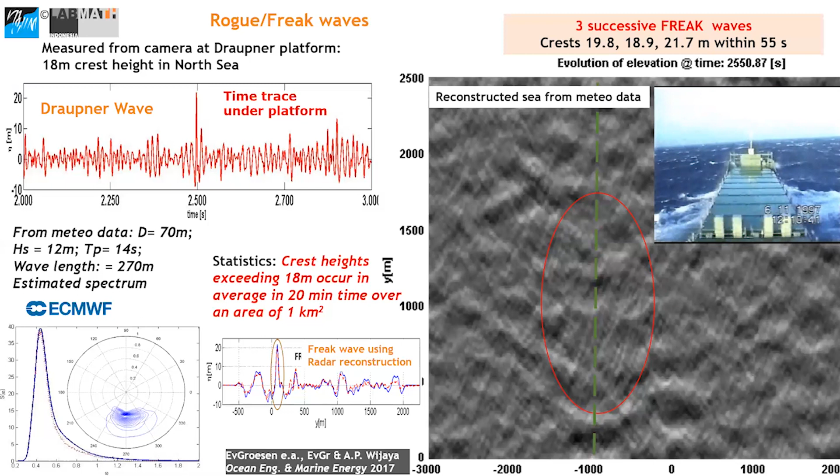Then from these shadow images, using our software, we reconstruct the whole sea, including the location of the radar. As the radar can look far ahead from the location of the radar and the ship, we can predict what type of wave will arrive at the ship, 2 minutes ahead of real time.

As I mentioned before, very high waves are very dangerous for a ship. So we went to the TU Delft lab and the MARIN lab to see whether our simulation can predict such high waves. In doing so, we wanted to generate a wave at 50 meters from the wave maker.

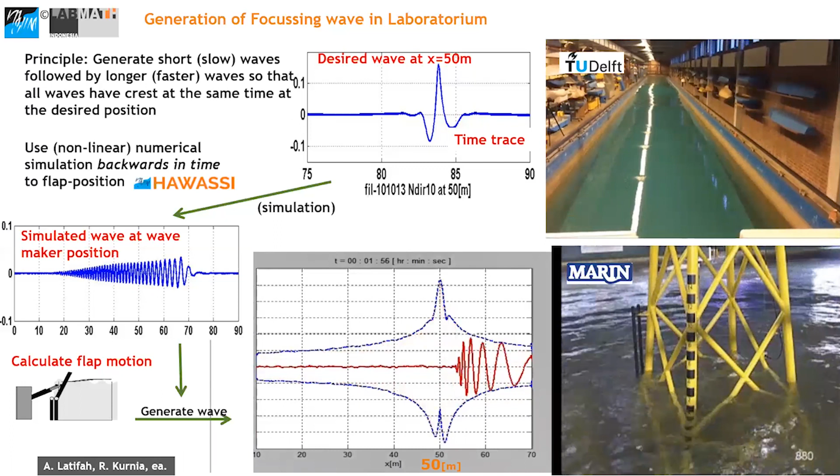So we are testing our software to see whether we can simulate the wave in such a difficult bathymetry. The input of the simulation is irregular, multi-directional, with a Jonswap spectrum.

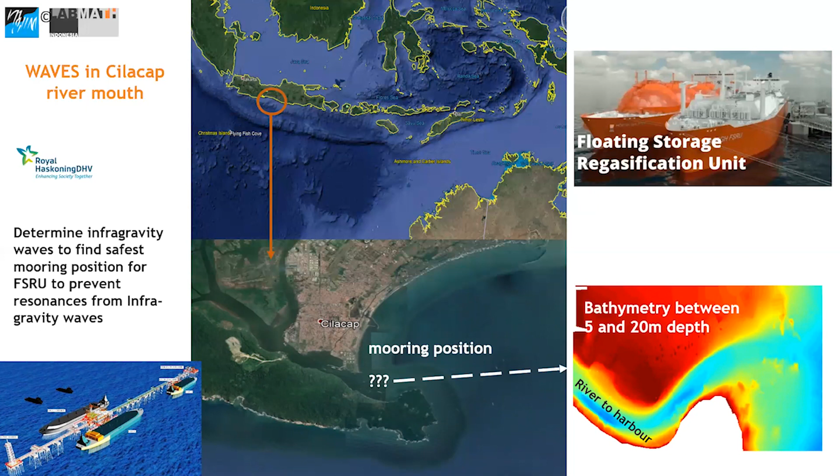To simulate this location, we use the wind field obtained from the ocean surrounding Cilacap, and using SWAN we calculate the spectrum. With this spectra we input into our software, and here is the simulation using our software. We filter only to obtain the infragravity wave, and from here we can see the location where the position is safest, where the infragravity wave doesn't impact the location.

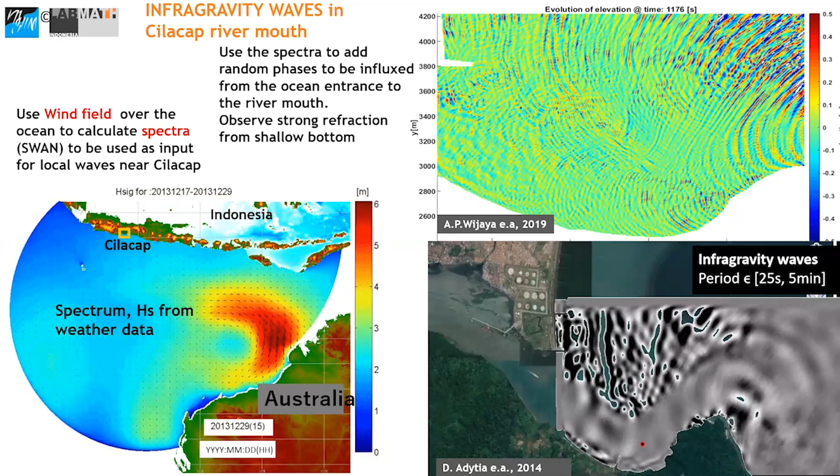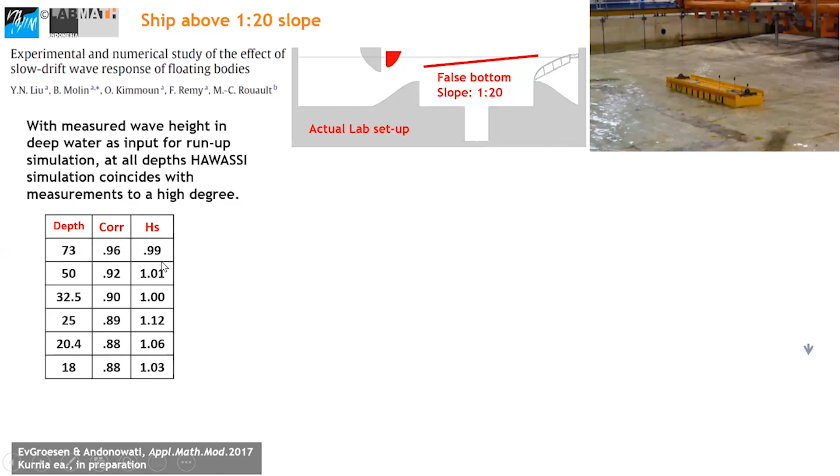This is the last of our technical presentation. Now I'm going to explain about Hawassi software. What is Hawassi software? This Hawassi has been developed within our institute over 10 years.